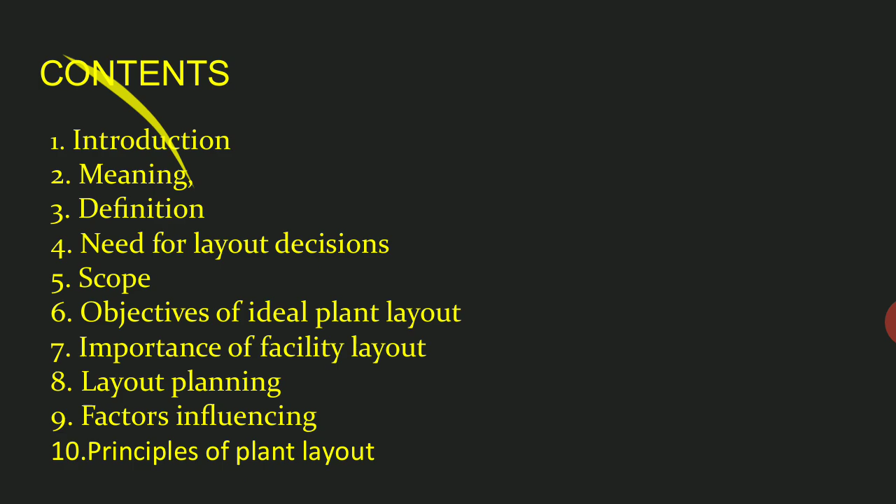Here we have already started, as you all know, with unit number 3, that is facility layout, and have dealt with so many different aspects of facility layout, right? In the previous sections, we have already done with the contents, as you can see on the slide here. 1 to 10 contents we are done with. As far as the rest of the content is concerned, yes, we are done with the 11th and 12th one.

We are dealing with the types of layout. From examination point of view, this section is very, very important, and we all must take care of this section in a particular manner. So if we are dealing with types of layout, there are different types of layout, which I have already discussed with you in the previous lecture, and we have already started with one of the layouts, if you remember, that is product layout, right?

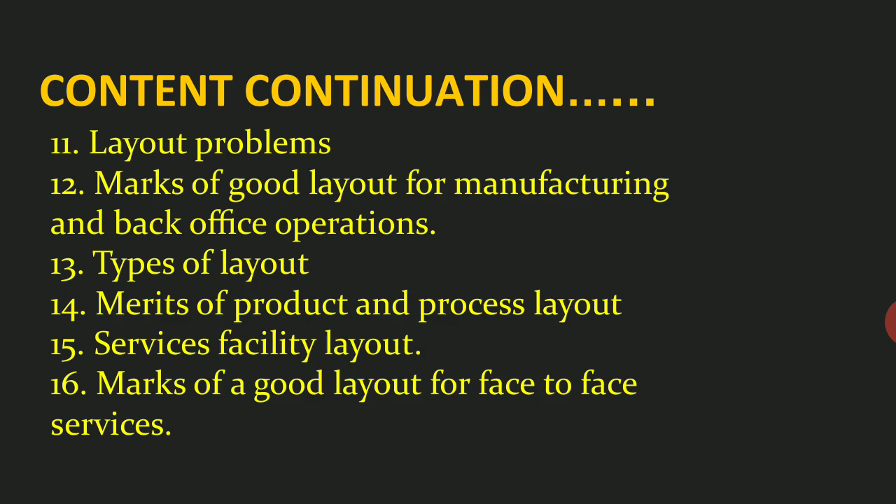We'll be dealing with the rest of the layouts today, but before that I'll just brief the content of the chapter, right? Thus, plant layout is what? It is an appropriate arrangement of the machineries, equipments and other industrial facilities which we require for production. The main purpose of plant layout is to achieve the fastest and the smoothest production at the minimum cost. That means if we want the fastest, the smoothest, and cost effective manufacturing, then we need to have the plant arrangement done. That means the machineries and the equipment should be placed in a proper manner.

We have already discussed the principles, the problems of the layout, and we have also seen what are the marks of a good layout, right? We have also introduced the types. There are 5 different types that we'll be studying. Out of that, in the previous session, we have discussed the product layout, right? We will just check out the things here in brief, and then we shall go further. By now, we know that the layout is nothing but the arrangement, placing or grouping of the machines for the purpose of production.

There cannot be any single type of setup used for all the types of production of the material or the goods. That means a single type of machine or design cannot be used for all the types of product. In that case we need to have different styles, patterns or grouping of the machines for different products, and that is why these types of layout can be used by the manufacturer depending upon his own requirement.

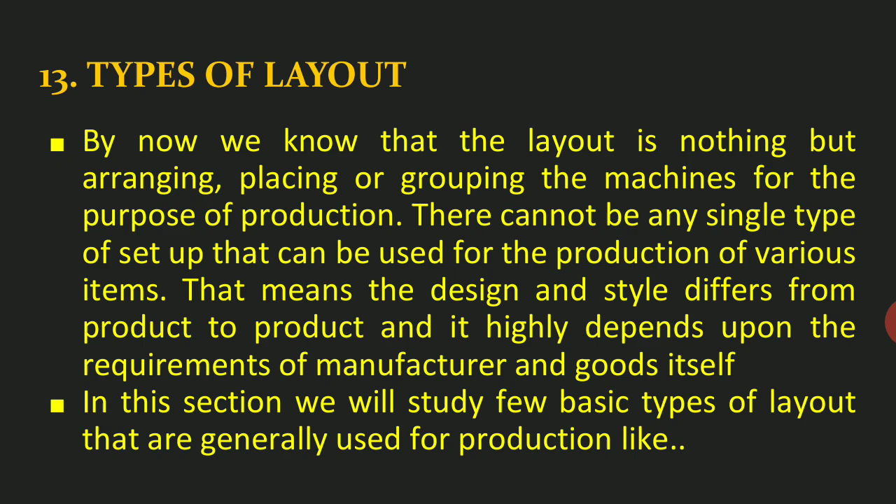In this section we will study a few basic types that are generally used for production. As you can see, there are 5 types which we are going to study. Product layout, or straight line layout, we have already done. Process layout we will be doing in this session, and then we move to the static layout, cellular layout, combined layout, and likewise.

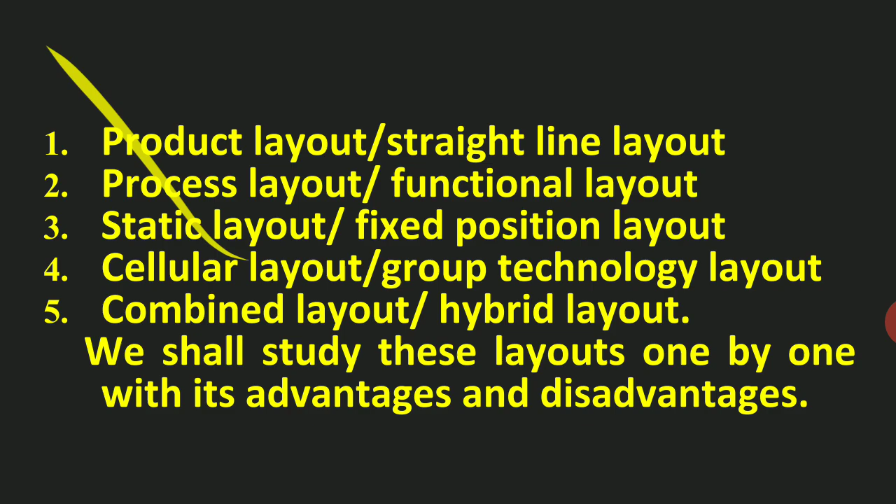So, let us revise the product layout. Product layout refers to a production system where the workstations and equipments are arranged in a particular sequence in which the raw material flows for the production and will be operated upon. Product layout is also known as line layout or straight line layout. Here the product flows from one machine to another in a particular sequence, so that at the end of the sequence we have the whole product ready.

And that is why here the product is very crucial, very important. The product falls from one machine to another one in a proper sequence. Hence it is also known as line layout.

Here the work is done in a small part or amount at each workstation, which falls in the straight line. That means the work is taken up in small parts at each workstation. Here workstation is nothing but the type of machines, right?

In one machine, if the small work is done, it passes on to the next one and to the next one in the single straight line, and that is why it is known as the workstation, or maybe it is known as the machines, right? Here again I repeat, the product is very important.

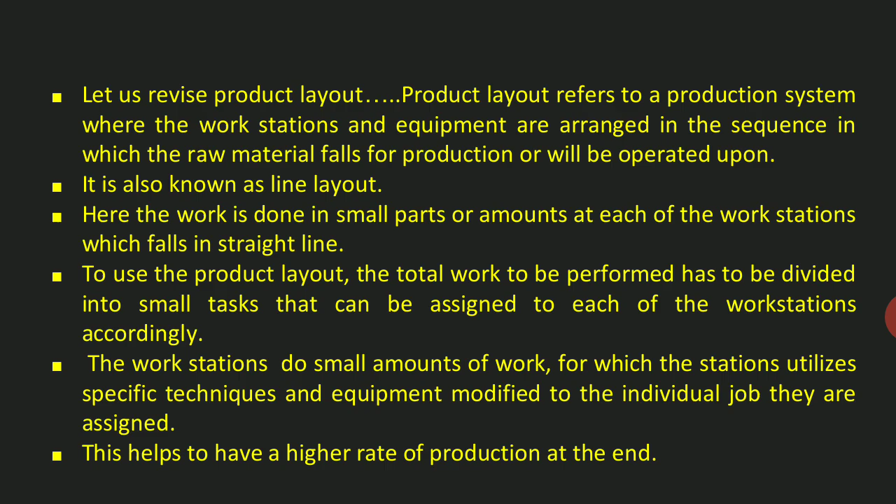That means when we want production to be done at a very high speed, or in mass scale production, then the product layout is the best option. When you can divide the work in small tasks, you can select product layout. When we want it in bulk, we can select product layout, and moreover standardized goods are produced. So at that time product layout is the best option.

Now, today what we are going to study is the process layout. The name itself tells you everything. In product layout, product was important; here the process is important. Process layouts are found primarily in job shops or firms that produce customized or low volume products that may require different processing requirements and sequences of operations.

That means when you want customized goods, when you want low volume goods being produced, then process layout is the best option for us. Moreover, process layouts are those in which operations of similar nature or functions are grouped together. This is very, very important.

In process layout, all the machines performing similar jobs are grouped together. That means all the machines, say 5 machines doing the same type of work, are placed together, and that is why it is also known as functional layout. Their purpose is to process goods or provide services that involve a high variety of processing requirements.

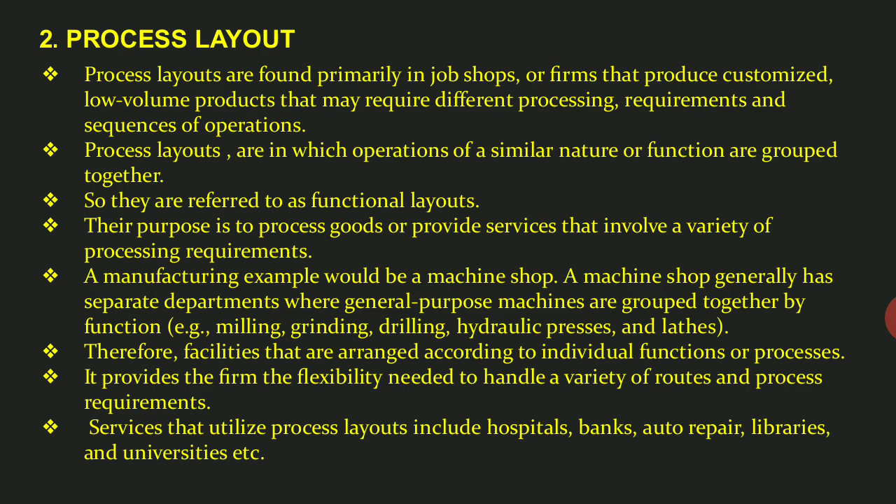then in a library, so many books are available, but all the books are placed in such a manner that each section serves a different purpose. If you are finding any science book, you go to the science department, and you get all the books related to science. Likewise, if you move to the literature department, you may have English language books, literature books of Gujarati, Hindi, and so on. That means according to the functions they serve, they are arranged, and that arrangement is known as process layout.

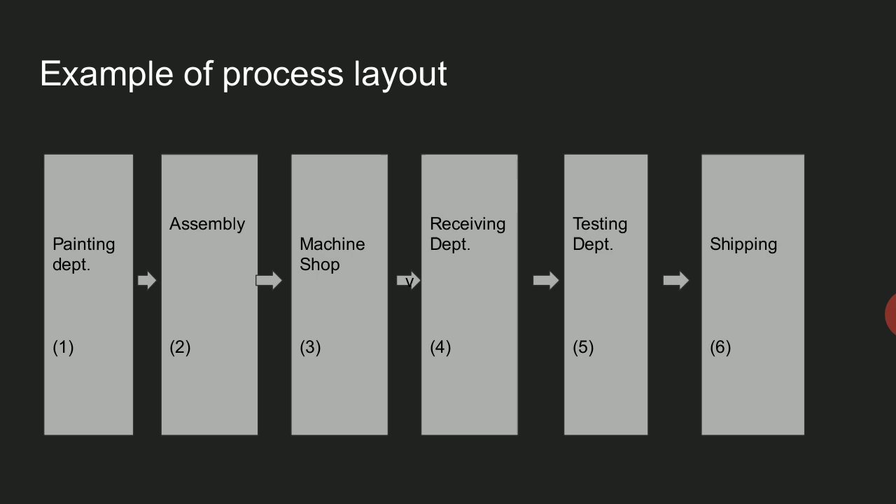Means all the arrangements performing the same type of functions are placed together, and that is why it is known as process layout; more or less all the machines are grouped together depending upon the functions they perform. We can see from the above example that the same type of function is performed in a single department. Like if painting is to be done, then 2 to 5 machines or sprays may be there performing painting in a single area. Likewise, there may be an assembly area, receiving department or shipping area performing the same functions.

That means it justifies the functional process. That again means that a particular function performed by multiple machines is placed together. So we can say that in this type, all the machines performing similar types of operations are grouped together. Grouped together is a very important term to remember. It's a kind of clue that makes the whole process very clear to you.

Here, machines may be shared by several products. Naturally, several products may be coming to the same machine, so that we are making maximum use of the machines that we have installed. The machine groups are generally arranged in sequential form. Naturally, one by one, things pass on from one group to another. Here, the process is more important than the product, and the machines are general purpose machines.

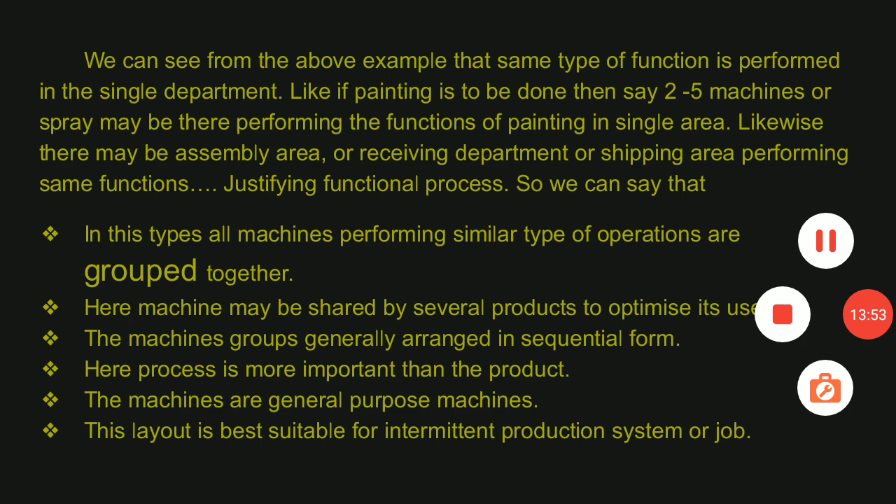Again, this layout is best suited for an intermittent production system or job. That means the layout is best when you are doing a job shop or customized production, or production which requires a kind of interval in between. These may be the best selection, the best kind of setup.

Here we are going to check out a few of the advantages of process layouts. Number one is flexibility. It is a very flexible type of setup, because the firm has the ability to handle a variety of processing requirements.

That means if 5 machines for painting are there, we are not going to use all the 5 machines together; we may use only 3 machines together, and it provides the flexibility of not using the rest of them. That is why it is very flexible as compared to product layout, because in product layout, once the raw material falls from one end, it keeps on falling in sequence, and at the end what we have is the finished product. There are hardly any chances of flexibility.

Next is cost. Sometimes the general purpose machines utilized may be less costly to purchase and less costly and easier to maintain than the specialized equipment. That makes it more cost effective. That means whatever machines we are using, they are all general purpose machines, and that is why, as compared to specialized machines, they are comparatively less costly, and that makes the whole affair a little cost effective.

Next is motivation, how it gets you motivated. That means employees in this type of layout will probably be able to perform a variety of tasks on multiple machines. If multiple machines are there, the employees get a chance to perform on all the types of machine, and this helps to break the monotony, or the series of work being performed in the same pattern, which is not possible in the product layout, because repetitive and assembly kind of work is done in product layout. So you hardly get any chance of change as far as employees and their work is concerned. But here the employees get a little freedom to work on multiple products or multiple machines, and that helps to motivate them.

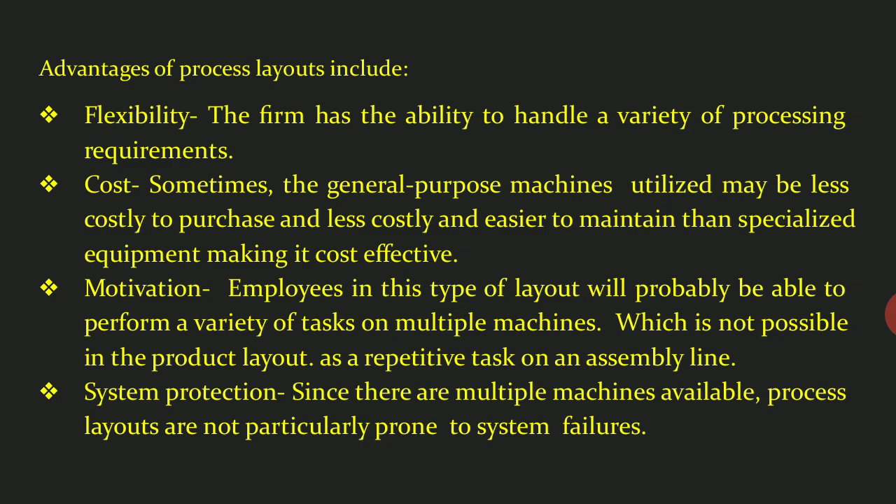Again, specialization in supervision is possible. That means if supervision of a particular area or particular function is to be done, that can be done very easily. Duplication of machines can be avoided. Why? Because if the same function is to be performed on multiple products, you can always bring those products to this area and perform on them. That means facilitating the most favorable use of installed capacity. Whatever the installed machines are, we can use them 100%, and that makes it very cost effective also, and installed capacity can be used to its max.

Again, a process layout also allows the employer to use some type of individual incentive schemes. That means if an individual function is performed very well by the people working on it, or the workers working in a particular group, say 5 machines and 5 people, are working at their best, then incentives can be provided on that basis, and you can motivate the workers also. So in many ways the process layout is very important and very advantageous.

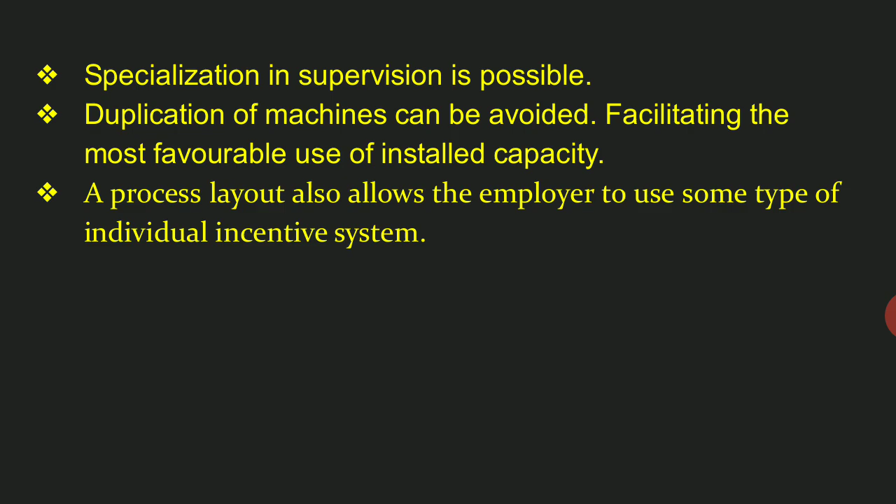But as the coin has two sides, so the process layout has its own gray side also, and that is what makes its disadvantages, or we can call them the limitations. We will check out a few of the limitations here. Say, utilization. Equipment utilization rates in process layout are frequently very low, as the usage of machines is highly dependent upon the variety of output requirements. At times the use of all the machines in a single group is not possible. Say if you have a small order, the perfect use of all the machines cannot be done at the same time. That's the disadvantage.

Again, that relates to cost also. If batch processing is used, cost could rise, or it may lead to a heavy cost of in-process inventory, because so many types of grouping of functions are being done at that time.

If you are doing some kind of batch of 100 products, then you are using only that many products and you need the inventory for that purpose only. So in that case, it may be a kind of costly affair. Again, lower volume means higher per unit cost. Naturally, economy of scale cannot be used here, because here we are producing everything on a lower volume.

In that case, the per unit cost always goes high, and this is what you are learning in costing also, and that's very natural. You have learned it somewhere in economics also, that economies of scale cannot be held if you are producing something in a lower volume, because it will increase the per unit cost.

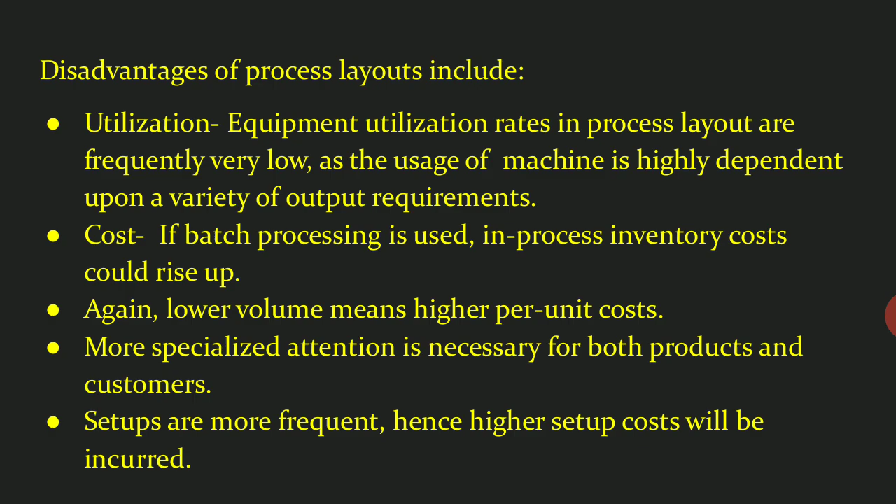Setups are more frequent, hence higher setup cost will be incurred. As I told you earlier, in the advantages we have seen that it is highly flexible. If it is highly flexible, every now and then we keep on changing the setup. If we keep on changing the setup, there may be higher cost of setup, right? That means you may require more people, more material handling things to change the setup every now and then, and in that sense it may be disadvantageous.

Again, material handling is slower and more inefficient. You take it from one place to another, it takes time, because groups of machines are working on different products, and it is more inefficient as compared to product layout, because in product layout everything falls in a straight line. So backward tracking, forward tracking is generally not there, whereas here it is there. So material handling is a little inefficient.

Again, the span of supervision is small due to the job complexities, right? Routing and setups are there, so supervisory cost may be higher. Small things are to be supervised at a time, and that may lead to the higher cost of supervision. Additionally, in this type of layout, accounting, inventory control and purchasing usually are highly involved. You have to buy things, you have to keep so many things in stock, so inventory may go high. The accounting may be done every now and then, and that may lead to higher cost.

Again, there may be confusion related to the setup, because you constantly keep on changing the schedules and the arrangement because of its flexibility, and that may be a little confusing at times. And it is difficult to maintain the line balancing, meaning if you want the things divided into small tasks in a balanced manner, that is not possible, and waiting time and idle time also increase.